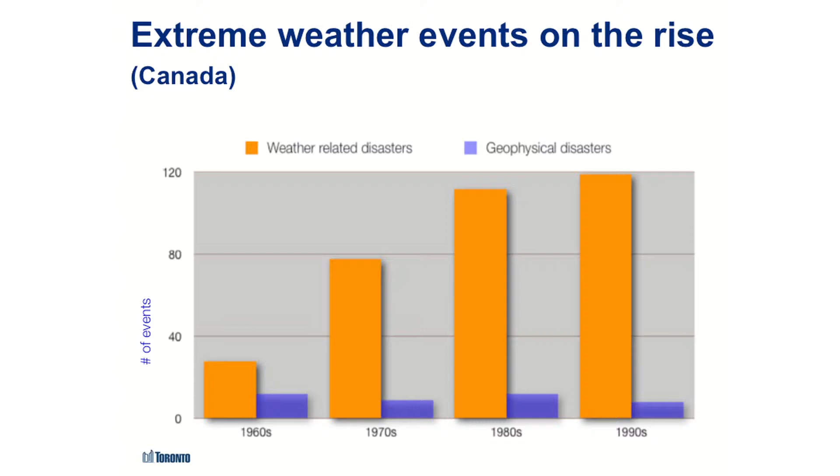This slide shows you that extreme weather events are on the rise, whereas geophysical hazards, shown in blue at the bottom, those hazards are staying about the same. So what I mean by that is volcanoes, earthquakes, tsunamis, they're staying about the same, whereas the weather-related disasters are increasing over time.

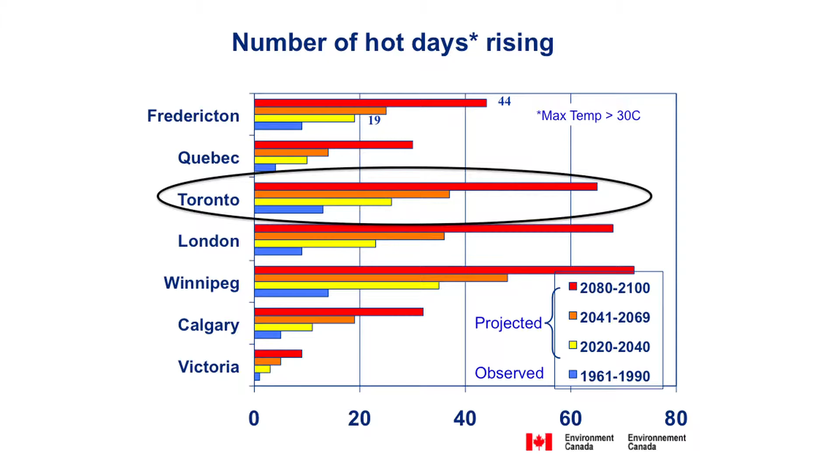In the period 1961 to 1990, Toronto averaged about 13 hot days. That is, days at 30 degrees Celsius or more. So you can see that by 2041, which is not that far off, the number of hot days is predicted to be more than double, and then almost double again by 2080. So by 2080, our climate might be more like North Carolina in terms of hot days. That's pretty shocking to think.

So there are two main types of actions in response to climate change: mitigation and adaptation. That's the focus of my talk today. Mitigation involves reducing greenhouse gases. Adaptation involves proactive action and also seizing opportunities.

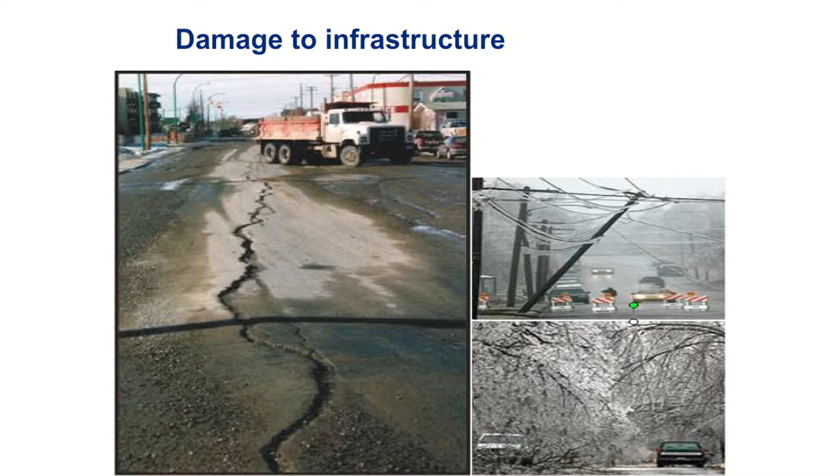Our infrastructure is already aging and is at further risk due to climate change and extreme weather in particular. Buildings, water pipes, sewers, roads and bridges, and the electrical system can be at risk. So when we have a hot day and the electricity system is highly under stress, that can be a time when we could have a blackout, and that's when people without air conditioning might be especially vulnerable.

In addition to the cost of repairs and replacement of infrastructure, the impact on residents and businesses can be very significant. People without air conditioning and with pre-existing health issues can be at risk during prolonged heat events. On average, about 17 people per year die prematurely due to heat-related incidents. Hot days result in more smog. During the 2003 heat wave in Europe, there were tens of thousands of premature deaths.

So I'm happy to say that public health has an extensive heat response program, which involves a variety of city agencies with staff redeployed to seek out and help vulnerable people.

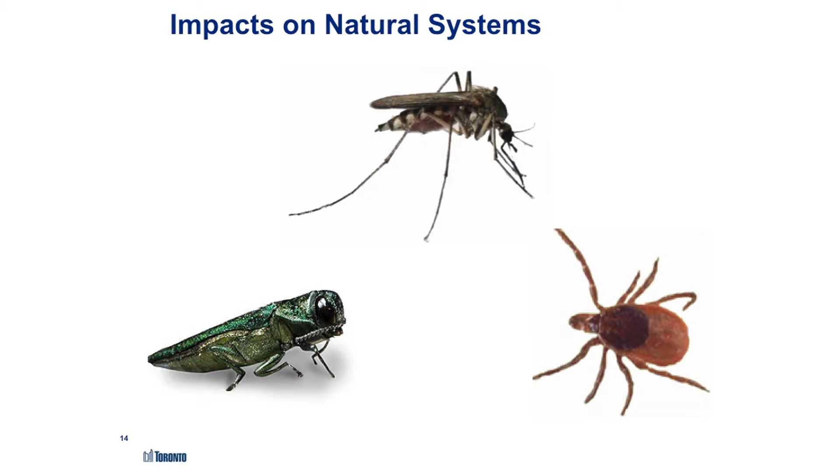Now, there's also a lot of impacts on natural systems. The top one is a Culex pipiens mosquito. That's the type of mosquito that carries the West Nile virus. On the bottom right, you have the black-legged tick. That carries Lyme disease. And on the bottom left is the emerald ash borer. So the emerald ash borer is an insect that is killing off our ash trees.

Some neighborhoods are more affected than others, and there's two reasons they might be affected more than others. And it's funny, we may have extreme rain in one spot, but nothing too much in another. And then another issue on why some neighborhoods may be affected more than others is that they may have a soup bowl effect where you've got a lower lying area and the sewers were simply not designed to carry that much water.

Now, if you're driving along and you see a big sinkhole in front of you, you might not want to drive over it because you might have something coming up like this. Always a bad idea to be driving through deep water because this might happen. Complete collapse of the Finch Avenue arterial. This road was out of service for 14 months.

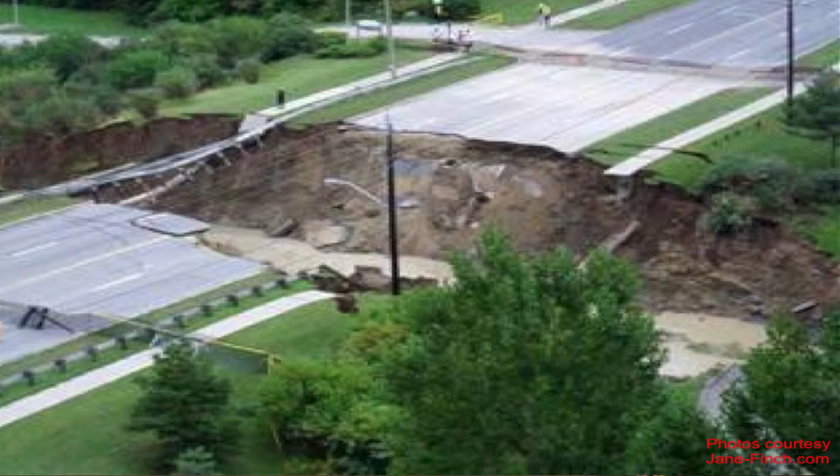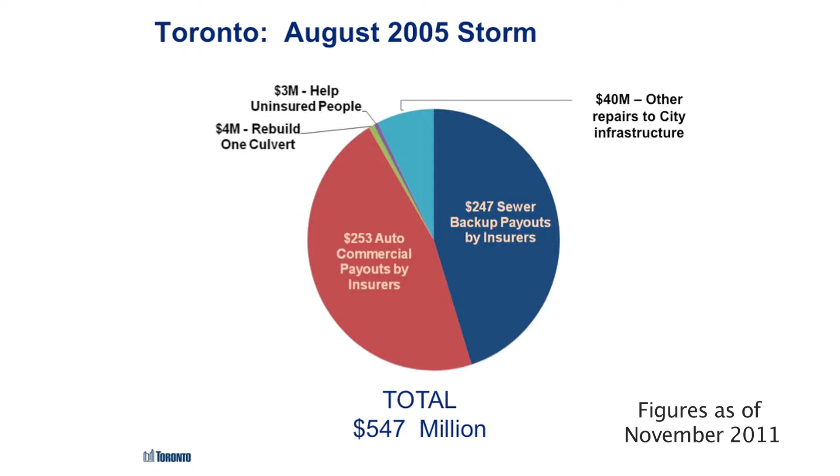To just give you a sense of the cost, within a 3-hour storm where there was 6 inches of rain in some areas, the total cost was $547 million. About half of that was paid out by the insurance industry for basement flooding, and the other half was for commercial payouts having to do with flooding of automobiles or business disruption.

TTC underground bus loading areas and also subways are at risk in the case of extreme rain. Indeed, Toronto is taking action, and I mentioned our climate change adaptation strategy ahead of the storm. It was unanimously adopted by City Council in 2008. The strategy identified short-term actions and also the need for risk assessments to identify and prioritize longer-term actions.

Two major parts of this work were local level climate modeling and also the development of this risk tool. The tool has been piloted in our roads department, or transportation services. I want to give you a sense of the level of detail of this risk assessment that was done for transportation services. This is what runs the traffic signals, okay?

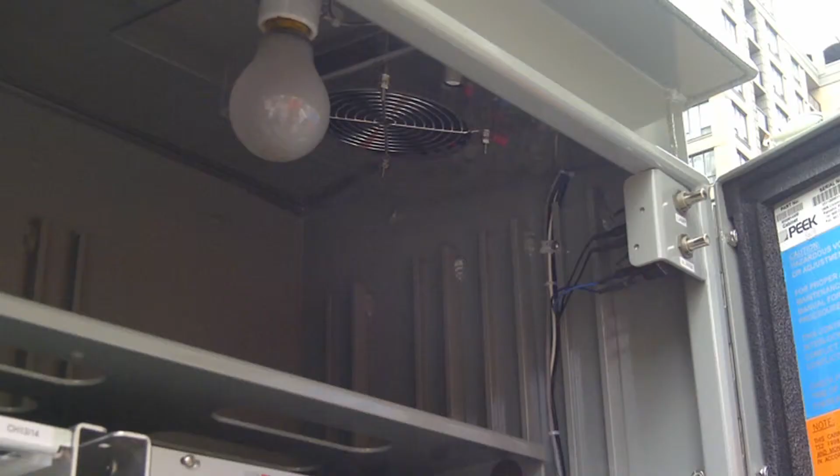Now, as we looked into the detail, we identified that some of the older model traffic controllers were actually failing in extreme heat conditions, so they're overheating. And so the staff said, well, in that case, we're going to have havoc if we have these things failing. And so we've got the new units that have a fan, but on top of that, we said, well, sometimes that fan actually fails. We're now adding a maintenance inspection of that fan. So that's the kind of work that city staff do to keep our city running in the face of climate change.

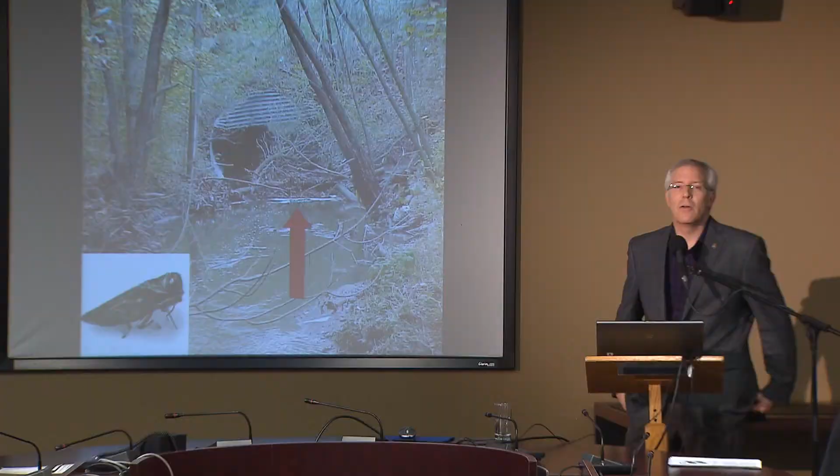The roads risk assessment identified culverts as a significant risk area. This is a picture of a culvert, and it shows that we've got some trees that have fallen into the stream and water has washed the trees close to the mouth of the culvert. And so city staff have identified this and they'll be cleaning it up shortly. But this is an example of how a culvert could fail.

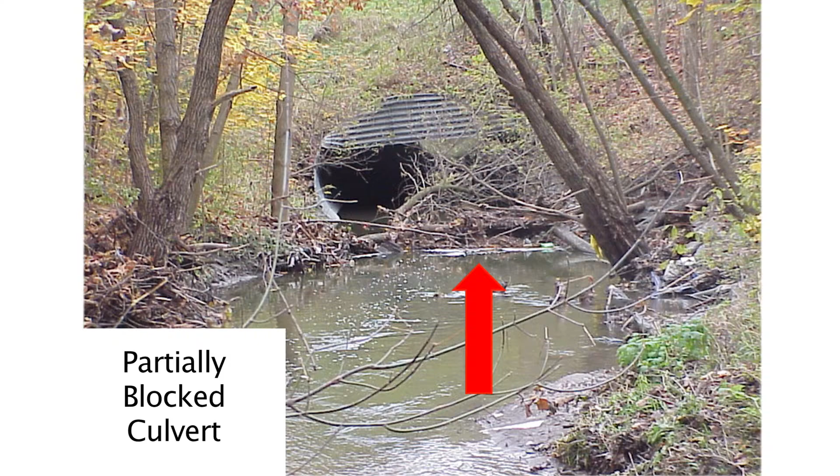So we've got 154 major ones and thousands of small ones. So this is the kind of thing where these culverts were not designed for really, really big storms, and it's essential that they be maintained. You can see that the top of it has actually been bent down, so there may be a repair issue there as well.

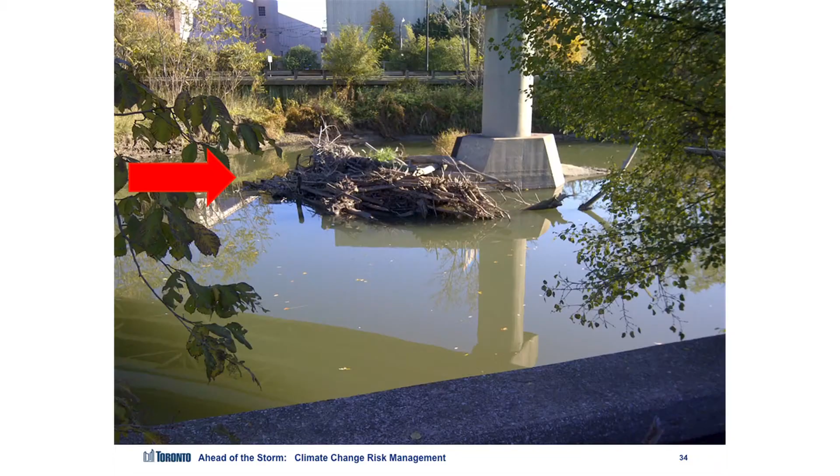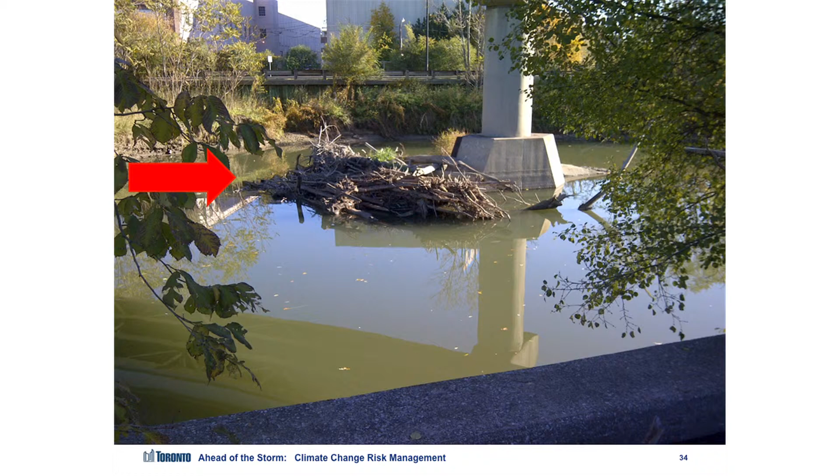And I'm gonna look in a little bit closer, but from the side. What you can see there is a lot of tree wood debris that has started to build up around there. And so staff monitor the level of debris there, and once it's getting to a level that it needs to be cleaned out, heavy equipment is brought in. So again, this is an example of the work that needs to be done. And if this is not well maintained, that can break loose and then further go downstream and cause problems such as blocking the flow of low slung bridges.

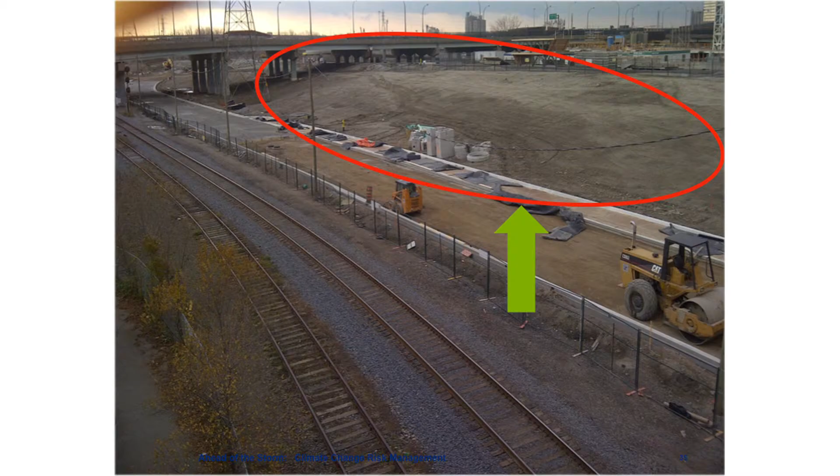So here's a good example of forward planning for climate change. Just west of that picture that I just showed you, it's a large earthen berm in the circled area, and it's constructed to protect the area west of the Don River from flooding. This berm has been designed to withstand greater than a 250-year storm. So this is forward planning.

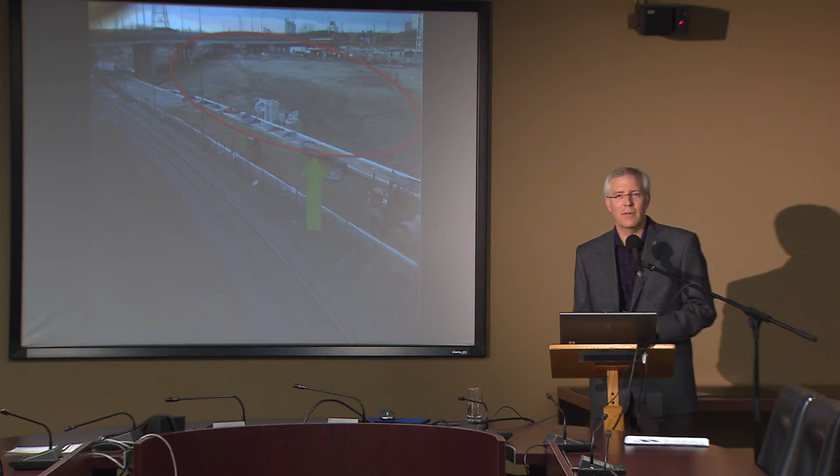So if you ever drive by there and you're wondering, why have they built that big hill there? Well, it's to protect the downtown. If that hill was not there, then we are literally looking at the possibility of Union Station having water pour down the steps.

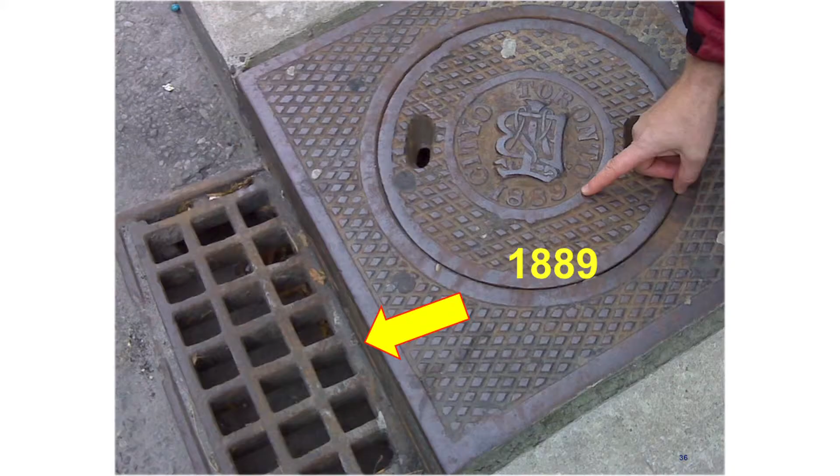Toronto and most other cities across North America have major infrastructure deficits. This means that investment in infrastructure maintenance, renewal, and construction has been deferred for many, many years. Here's an example. This is the storm sewer grate from 1889. Its relatively small drainage holes make it just a bit more vulnerable to being plugged. So if a plastic bag, a whole bunch of leaves got across there, there's just a little bit greater chance of that being plugged and the water not draining properly.

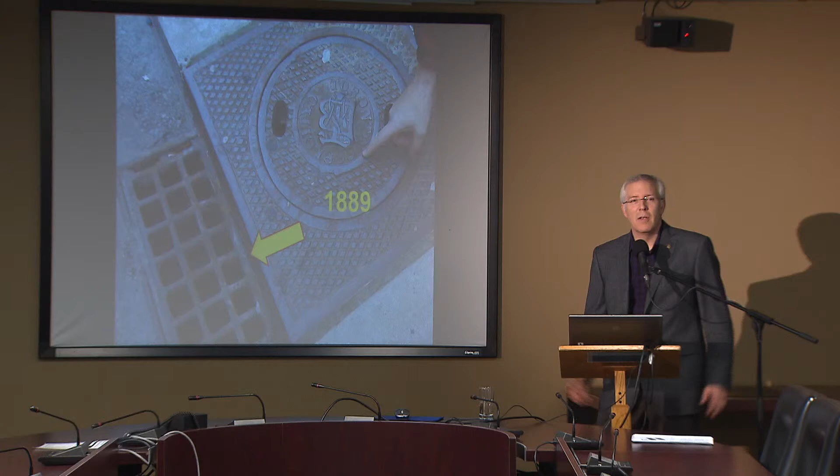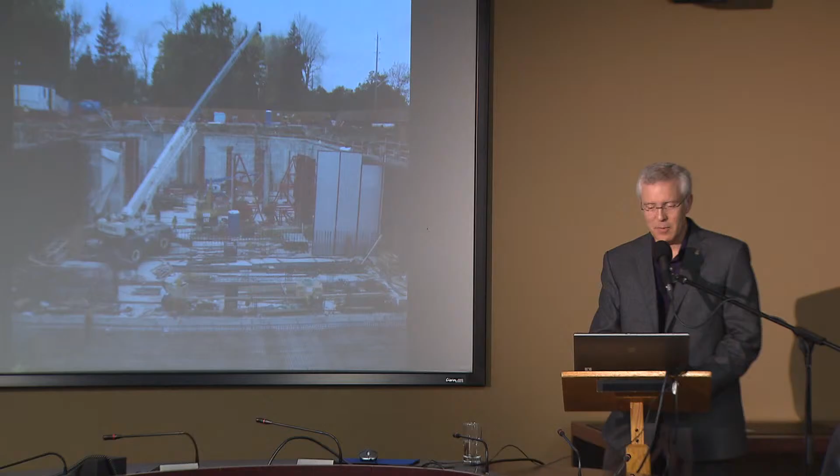Action is being taken by Toronto Water, big time. This is an underground stormwater storage tank under construction at Old Sheppard Avenue. The large stormwater holding tank will help reduce basement flooding in the Pleasant View neighborhood of Toronto. So that's a huge project. In fact, this is one of the very biggest projects that is on the go at this time.

Toronto's largest climate change adaptation program is the Basement Flood Relief Program, which began in 2006. The 2012 recommended budget includes $743 million in investment over 10 years from 2012 to 2021. Also, since 2003, Toronto has been implementing the Wet Weather Flow Master Plan, and this involves $1 billion investment over 25 years.

Toronto has an objective of increasing the tree canopy by 50%. Now that's a very aggressive target, taking into account we've got invasive pests, we've got extreme weather, and also we've got urbanization.

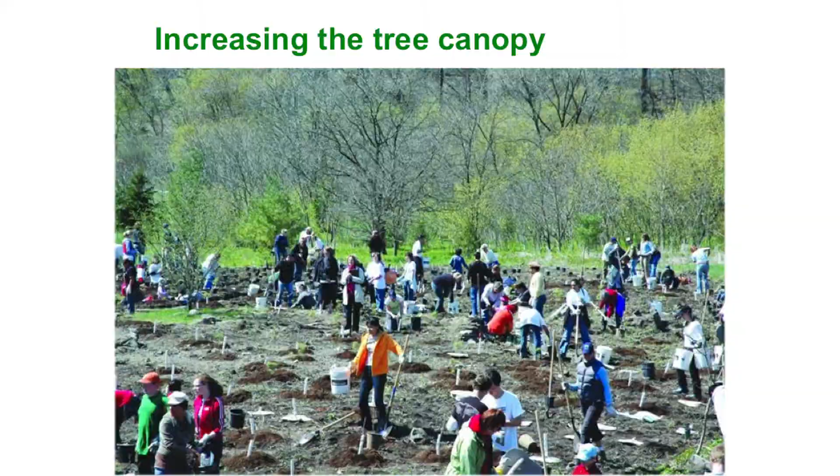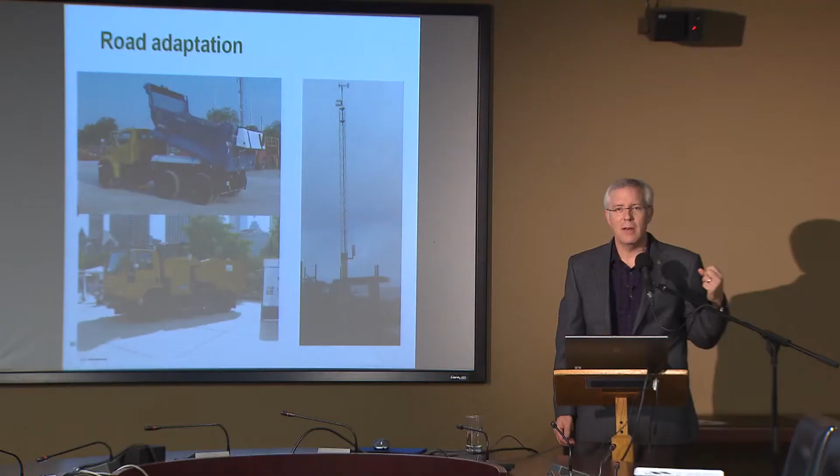On the issue of roads and climate change adaptation, the tower on the right is a road weather information system tower. And what this does is it takes weather measurements right on the spot, and we have these deployed at various parts across the city. So the information about wind speed, temperature, precipitation is detected and then sent back to the central control yards, and those people deploy salt trucks like the one on the top.

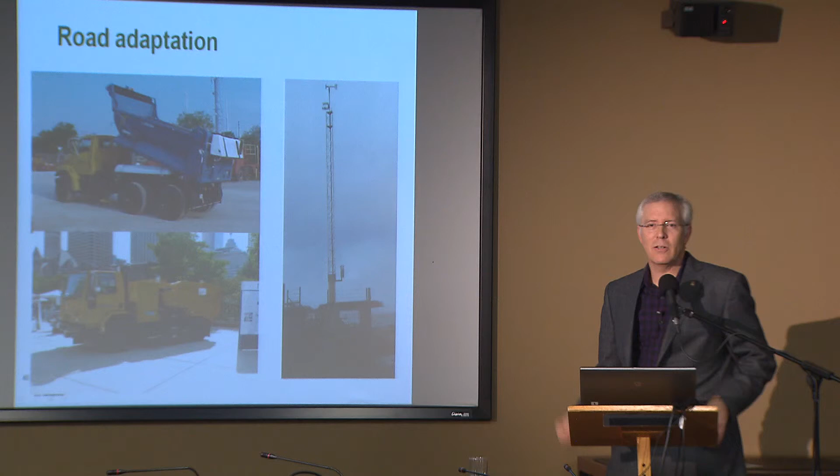Now that's a 3-in-1 truck. It actually can apply brine or salt and brine or just salt. And that gives the city crews a much more versatile approach to being able to look after issues of icing on the roads. Also, the trucks have sensors that indicate the actual temperature of the road.

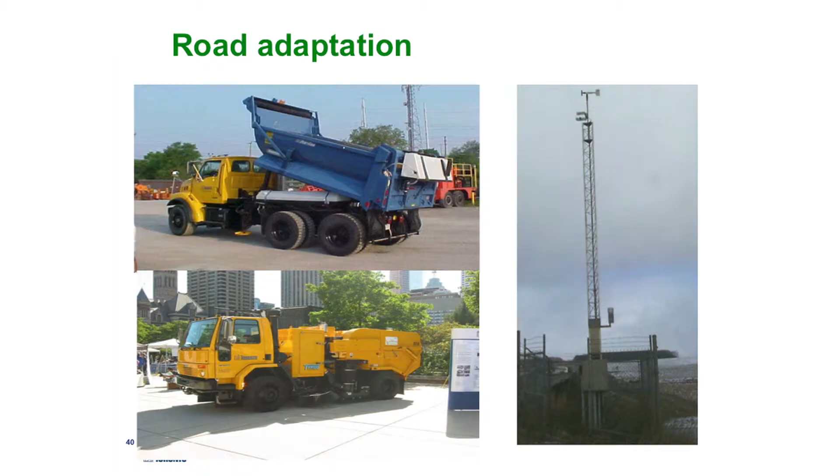And then you'd think, well, what's a street sweeper got to do with climate change adaptation? Well, the new street sweepers can actually operate without water. And so that means it can be cold and no snow, but have a dirty road, and you can still run it.

Residential flood protection is a significant area that we're trying to promote across the city. Property owners might find success in reducing water damage to buildings by regrading their lot, taking into account the drainage requirements of their neighbors. So you don't want to regrade and then cause trouble for your neighbor next door. You want to grade it so the water is going to a place that is not causing problems. On the right-hand side of the bottom, you can see a sewer backflow prevention valve, and this helps reduce the chances of sewer backup.

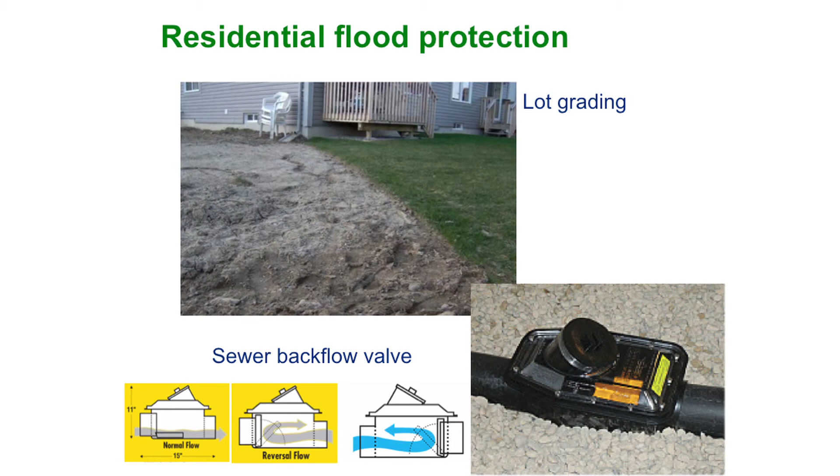Green roofs is another initiative. These are primarily helpful in cooling a building. They also can help retain a little bit of the runoff. Permeable pavement is also an area that's helpful if there's a part of our city where there's a lot of runoff and causing problems. By allowing the water to infiltrate on the spot in a parking lot, it can be worthwhile using this type of technology.

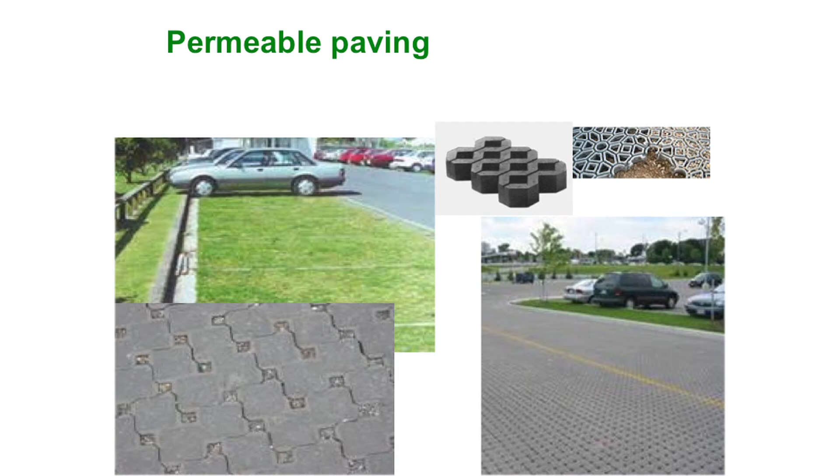We formed a group known as the WeatherWise Partnership. It has 60 members from various sectors, including banking, insurance, telecommunications, commercial and residential real estate, transportation, and communications. All 3 orders of government are also involved. Our main project this year is quite innovative. We're setting up a climate change vulnerability assessment for the electrical supply system of the entire Toronto region. And that was decided just last week. The group plans a summit within about a year from now to report back on the results.

In closing, I think that this is a very positive example of the multi-sectoral cooperation that is needed to make cities more resilient to extreme weather and to help ensure our continued prosperity.